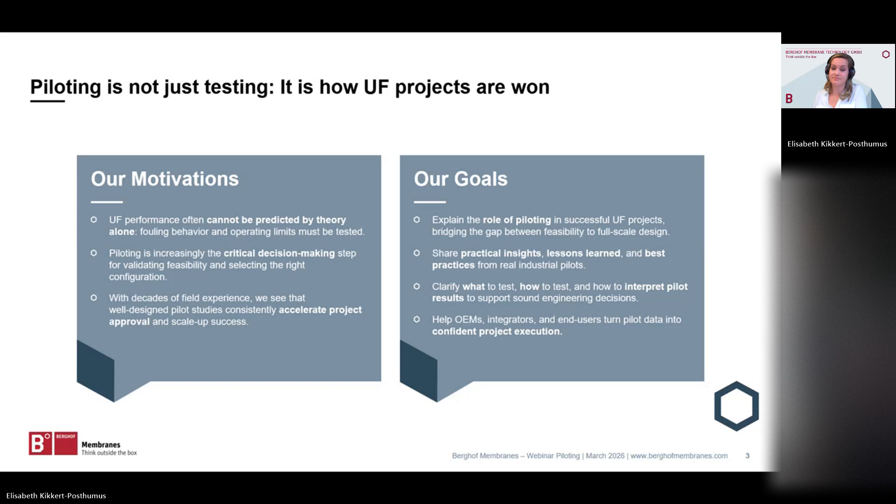We think outside the box. We're the leading manufacturer of tubular UF membranes for the filtration and separation of industrial wastewater and process streams, including industries like dairy, food and beverage, landfills, chemical, pharmaceutical, biogas plants, oil and gas, and many others. With more than 50 years of experience and over 2,500 installed systems across the globe, Berghof Membranes prides itself on the robustness, flexibility, energy efficiency, and superior quality of its external filtration membranes and solutions.

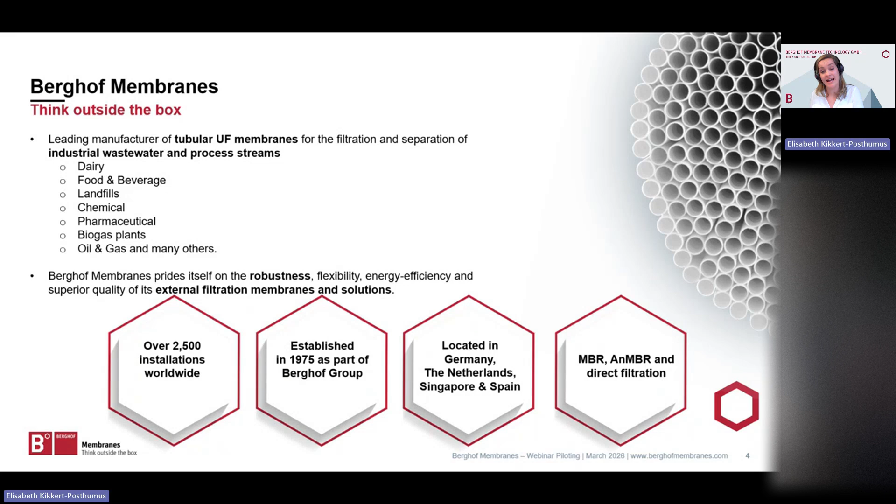We're located in four sites: Germany, where our manufacturing is held, and offices in the Netherlands, Singapore, and Spain. Our core technology is MBR, AnMBR, and direct filtration.

We have proven robustness in over 2,500 installations, as explained. Our membranes are available in different tube diameters, materials, and cutoffs, with multiple features like standard, backwashable, and chemical resistant. We have pilot modules available in different sizes, screening versus scalable. Industrial modules are available in different diameters and lengths, up to 71 square meters, unitary surface.

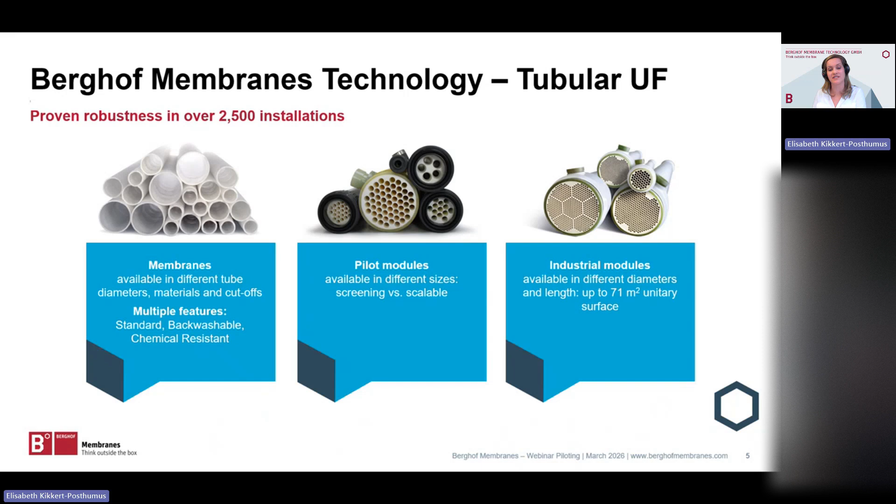We have a BCare service and support program, something Daniel will explain more in his presentation. It involves application analysis, pilot testing, engineering and commissioning, and technical and after-sales support.

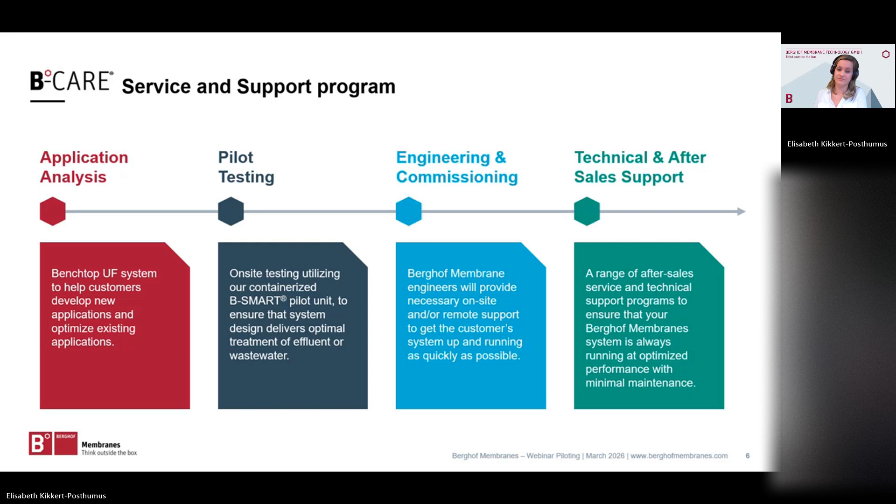Now let's get into detail and discover the best practice approaches for designing and executing tubular UF pilot studies. It's my pleasure to introduce our first speaker, Dr. Elena Meabe. Just a short introduction about her.

Elena is a manager at the Knowledge Center at Berghof Membranes. She's a chemical engineer and holds a master's degree in environmental engineering. She's also a doctor in industrial engineering, with her PhD research work focused on membrane bioreactor technology and the monitoring of membrane performance. To this day, she possesses 18 years of experience in filtration technology, mainly dealing with external tubular membranes. She has deep insight into membrane technology for the industrial wastewater treatment market and will now guide us through key insights on today's topic.

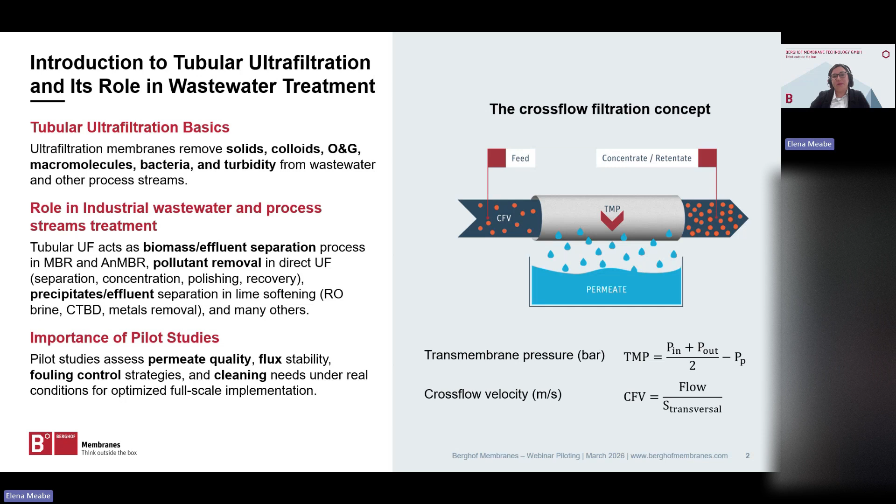On the other hand, it's important to highlight that ultrafiltration performance is often site-specific, and this is the reason why piloting is essential in many cases.

Before starting any pilot study, the most important question is: what do we want to learn from it? Typical objectives include assessing treatment performance, such as permeate quality for target pollutants and the suitability of different membrane cutoffs. Another key objective is defining a sustainable design flux under certain operational conditions.

Pilot studies also allow us to optimize operating conditions, such as cross-flow velocity, fouling control strategies, and CIP protocols, always trying to balance performance with OPEX.

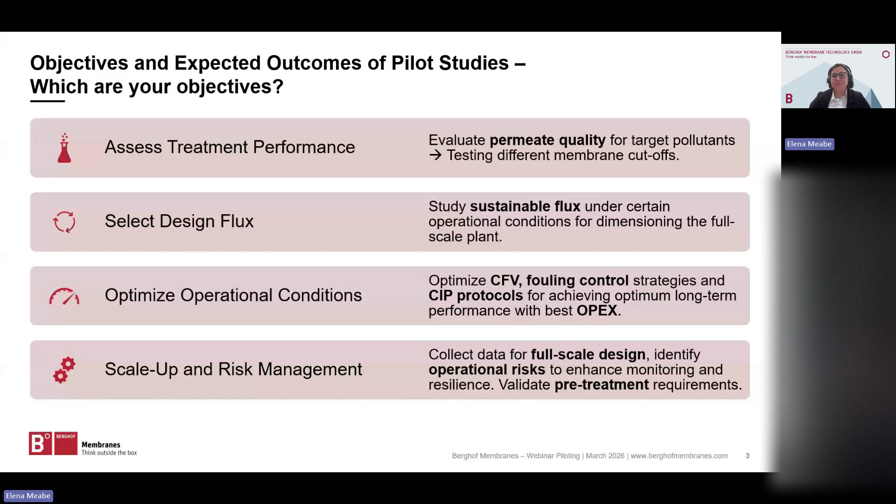Finally, piloting is a powerful risk management tool. It provides real data for scale-up, validates pretreatment requirements, and helps identify operational risks at an early stage.

Once we define the objectives, the pilot must be designed accordingly in terms of scale, pilot assembly, and monitoring strategy. Pilot studies can be performed at different scales, and each scale serves a different purpose.

We have the screening modules, which are typically used to evaluate whether a membrane is suitable for a given wastewater, or for comparing performance with different cutoffs, and also to observe fouling behavior in a first step.

Then we have the scalable pilot modules, which are designed to better reflect real operating conditions. They allow accurate measurement of pressure drops, permeability, and sustainable flux values that can be directly transferred to the full-scale design.

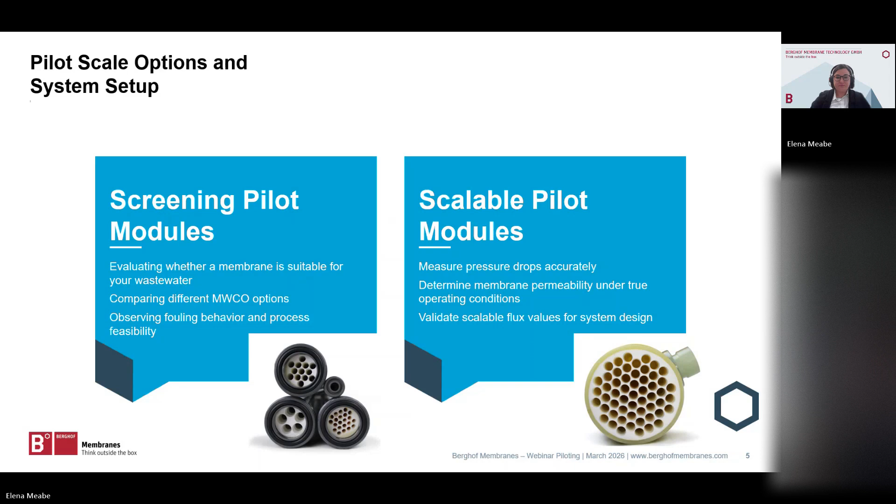When designing a pilot plant, several practical aspects must be considered. First, the operation mode: are we thinking of short-term batch testing, or do we need long-term continuous operation?

Second, the configuration of the UF pilot. It can be based on a feed and bleed configuration, or a simple circuit with just a recirculation pump and some instrumentation. We also need to design for fouling control and evaluate the need for including backwash sequences, for example if we want to approach the project with a B-SMART Eco mode, which relies on backwash sequences for reducing cross-flow velocity and therefore minimizing energy consumption.

Third, we need to decide about monitoring and control. Manual operation can work for short tests, but automated operation with data logging and remote monitoring is strongly recommended for larger-scale demo units.

Finally, we need to define the upstream process. In biological applications like MBR or anaerobic MBR, there are two potential scenarios: the UF pilot can be connected to an existing bioreactor or to a dedicated tank built for the pilot study. Each has different implications that we'll cover later in the webinar.

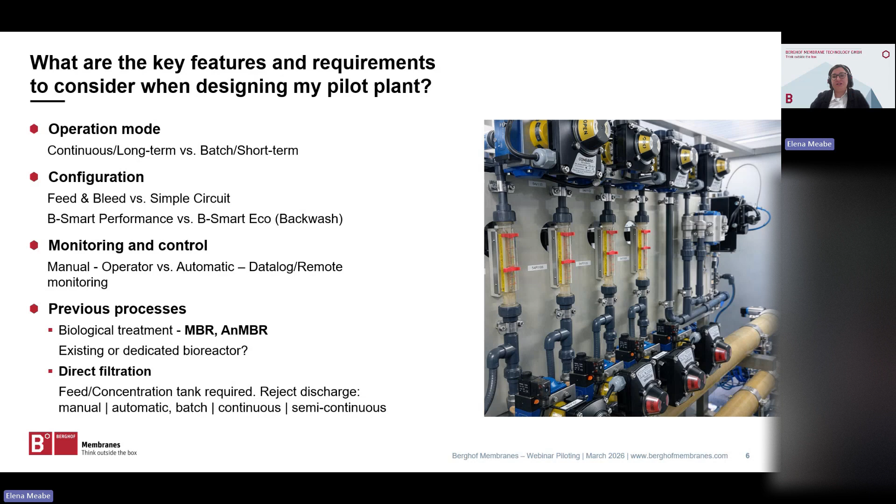In direct filtration applications, we need to install a proper feed and concentration tank, and also decide how to handle the reject and the operation mode, for example batch or continuous reject.

In this slide, you can find a summary of the main parameters typically used to evaluate ultrafiltration performance properly. Pressures, including pressure drop and TMP (transmembrane pressure), tell us how the membrane is being loaded and how fouling develops over time.

Cross-flow velocity is one of the most important parameters in tubular ultrafiltration, as it directly influences shear stress, fouling control, and energy demand.

In feed and bleed systems, the concentration factor inside the filtration loop also needs to be selected and controlled. And in concentration processes, global recovery and its impact on permeate flux must also be evaluated.

Flux and permeability are the core performance indicators, and normalizing them with temperature allows meaningful comparison over time and between different operating conditions.

It's also important to note the relationship between these parameters represented in the figure on the slide. This is the typical performance of cross-flow filtration systems, showing how flux behaves based on transmembrane pressure and how cross-flow velocity impacts the flux.

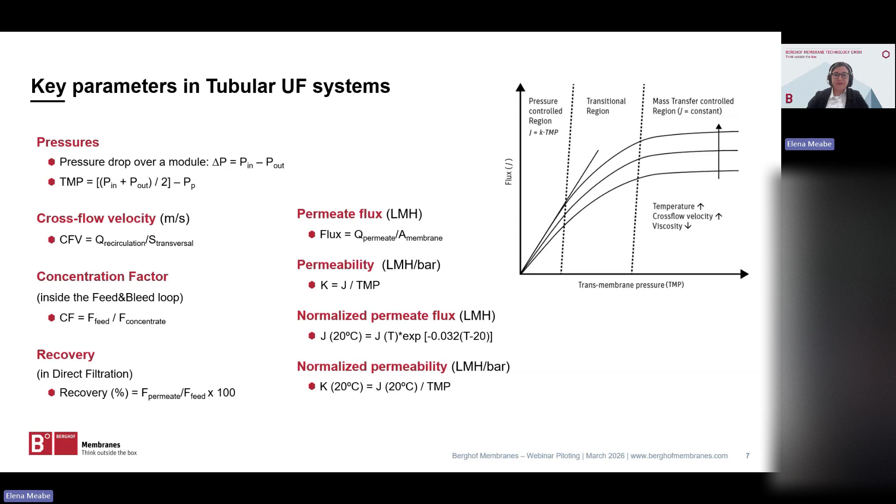A successful pilot follows a stepwise experimental plan. We start by clearly defining the objectives and selecting the membranes and configurations to be tested. Then we establish baseline operating conditions using normally conservative values to ensure stable operation and reproducibility.

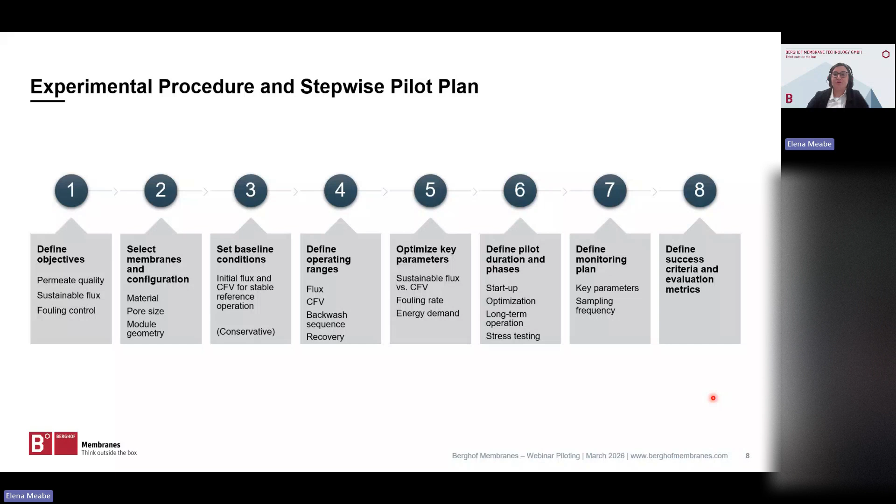Next, we define the operating ranges for key parameters such as flux, cross flow velocity, TMP, and recovery, usually covering both normal and stressed conditions. Then the pilot study itself is divided into phases: startup, optimization, long-term operation, and stress testing if desired. Finally, we need to define a monitoring plan and clear success criteria so that the results can be directly translated into design and decision making.

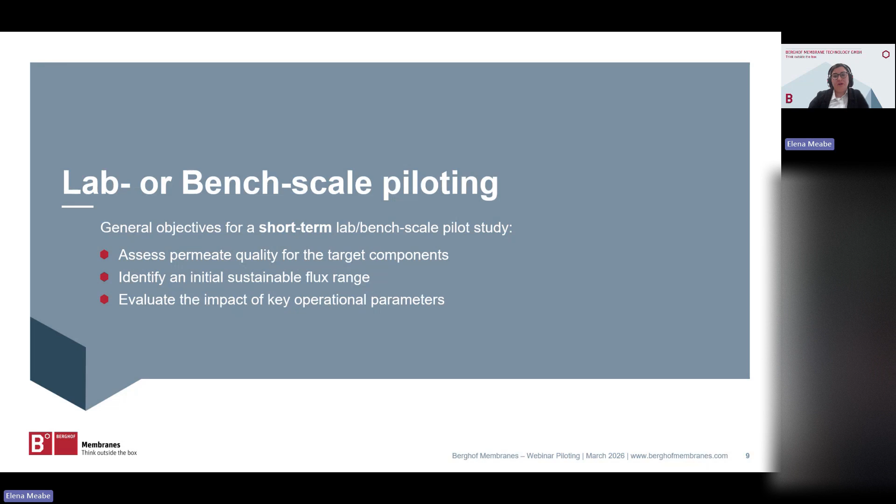Now in my presentation, I will mainly focus on lab and bench scale pilots. These are typically short-term studies, and their main objectives are to assess permeate quality, identify an initial sustainable flux range, and evaluate the influence of key operational parameters. These pilots are particularly useful as a first step to screen membrane options and define a realistic operating window before moving to a larger scale piloting.

Here you can see the basic elements required for the most simple bench scale pilot: a feed tank, a recirculation pump, and the pilot module. Then in the retentate or concentrate stream, we need to install a regulation valve. It can be a manual regulation valve that we use for pressurizing the system and also for controlling the transmembrane pressure.

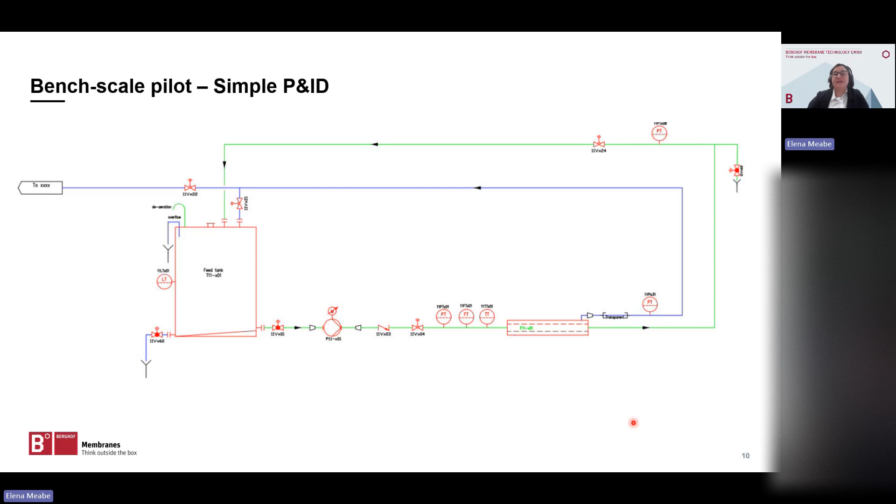In terms of instrumentation, it is quite basic. We need pressure indicators or transmitters at the inlet and outlet of the module, and also something to measure the recirculation flow so that we set the cross flow velocity for the experiment, plus something for measuring the permeate flow. It can even be measured manually with a graduated cylinder and a stopwatch. Usually both permeate and retentate are connected to the feed tank, which enables us to operate in recirculation mode and also to use the feed tank as a CIP cleaning tank.

The procedure for a lab scale pilot usually starts with a clean water flux test to establish the membrane reference condition. Then we evaluate filtration performance under fixed operational conditions, for example cross flow velocity of 4 meters per second and TMP of 1 bar. Usually this first stage is done in recirculation mode.

So we put the permeate stream back into the feed tank to assess a first general value for the flux. Afterwards, the system is operated in concentration mode, discharging the permeate from the system to achieve achievable recovery and system stability. Finally, we investigate the influence of operational conditions, mainly cross flow velocity and transmembrane pressure. After the filtration test, we can perform a CIP cleaning to evaluate the cleaning efficiency and fouling reversibility.

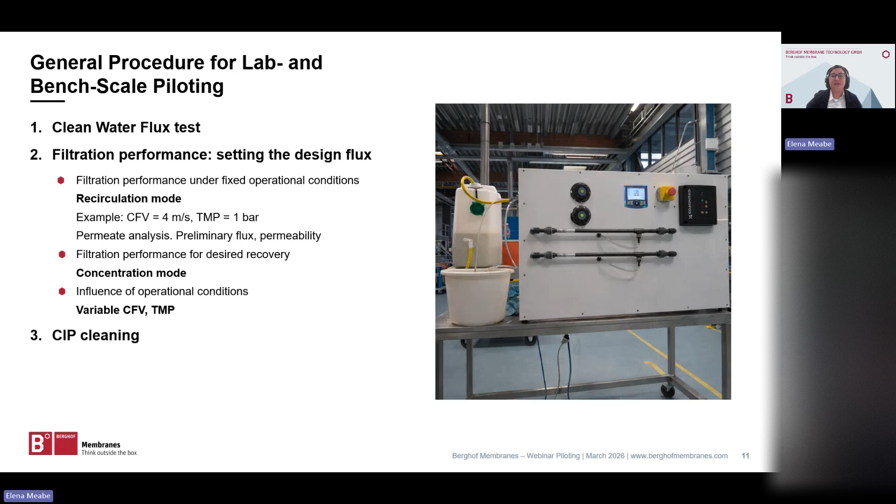This slide shows an example of a bench scale pilot, in this case treating laundry wastewater. On these graphs, the first one shows how permeability and recovery evolve over time. You see a first stage here operating in recirculation mode, at zero recovery. After some time, when the permeate flux becomes more or less stable, we start working in concentration mode, discharging the permeate from the system.

Here you see the evolution of recovery. What we can evaluate is the impact of concentration on the permeate flux. This impact can vary a lot depending on the wastewater sample we are dealing with. Here, for example, we see an initial decrease of permeability, but approximately at 45% recovery, the flux remains constant.

So once the target recovery is reached, 90% in this case, we leave the system operating in recirculation mode again, basically to assess flux stability at the target recovery. Then we evaluate the influence of operational conditions. The result is shown in this second graph.

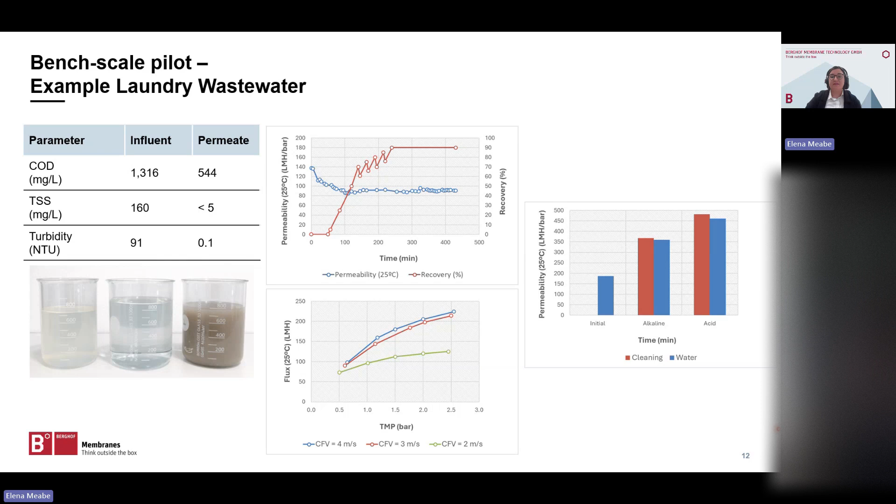Finally, we can apply a chemical cleaning to assess the most efficient protocol.

As I am approaching the end of my presentation, I just want to share some comparisons of pilot results with different wastewaters and a couple of practical tips.

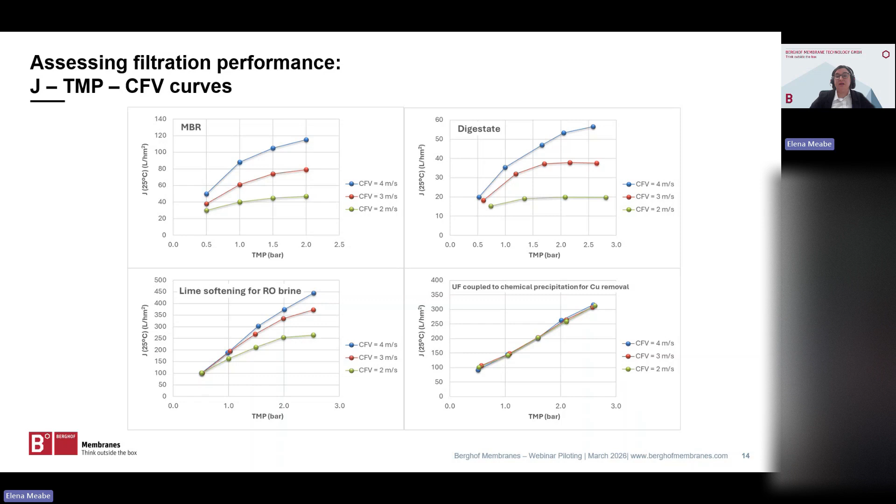We see first a linear relationship between flux and TMP. This is very good, meaning almost negligible fouling together with high permeabilities. But apart from this, there is no impact of cross-flow velocity. These are inorganic particles that are not really getting attached to the membrane surface. So based on this result, we can approach the design with low cross-flow velocity of 2 meters per second and minimized energy consumption.

This is my last slide. I want to share examples of optimization of chemical cleaning protocols, again with quite different outcomes for different wastewaters. First, in this case, it is MBR for digestate treatment.

We see that the initial alkaline cleaning recovers permeability to a great extent, which is logical because in MBRs fouling is mainly organic. But we still see an important improvement with the acid cleaning. In this case, this is due to the high hardness present in the digestate, which produces some kind of inorganic scaling.

We have a second example: oily wastewater, direct filtration for removing emulsified oil from water. Here what we were testing is a standard alkaline cleaning with sodium hydroxide and sodium hypochlorite, but adding a degreasing booster during this alkaline cleaning. You can see the difference is really important.

Here below we have another example. This was cosmetics wastewater, direct filtration. Again, we see that applying an enzymatic cleaning with a commercial enzymatic membrane cleaning product improves the efficiency significantly.

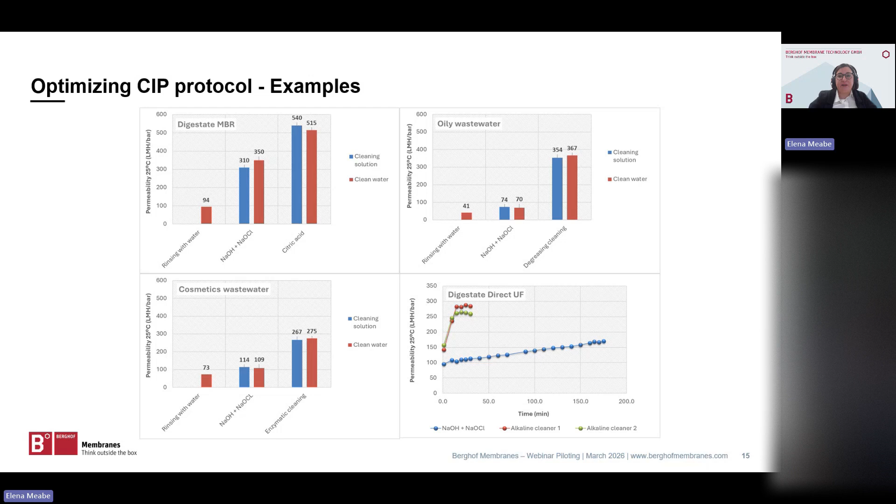This is the last information that I wanted to share today. I hope I have been able to transmit the importance and usefulness of proper piloting. I will be happy to answer your questions at the end of the webinar. With this, I end my presentation. Thank you very much for your attention, and we will cover any questions at the end.

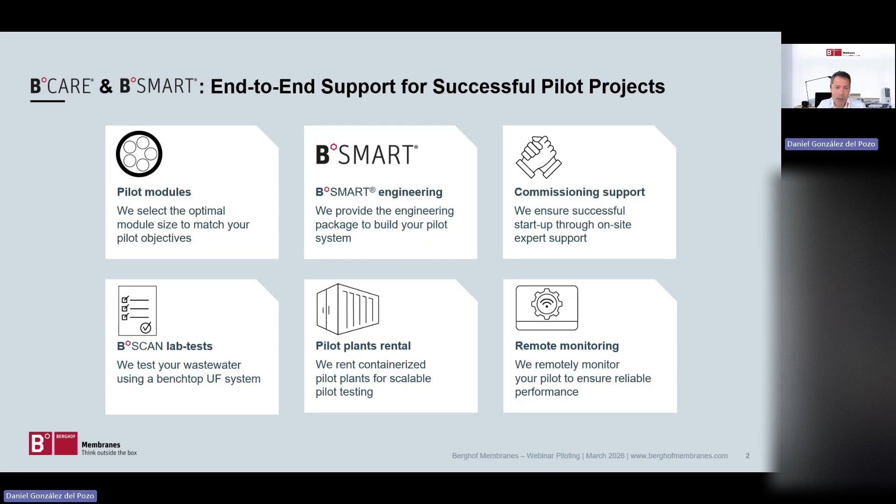Besides all of this, to support our customers during this journey, we also offer commissioning support, providing on-site commissioning support with our service personnel to ensure a successful startup. During the pilot tests, we support our customers by remote monitoring, tracking your pilot and ensuring its performance over the length of the trial.

Let's go deeper on that. Firstly, let's talk about our pilot modules. We offer flexible module options for different ranges. Our P1 module can be supplied in a wide range of options, either in PVDF or PES active layer, different cutoffs, and tube diameters from 5.5 to 12.7 millimeters.

The P1 Flex module gives you exchangeable membranes for testing, so it's a very flexible option. Besides, we have the P5, 13, and 22 modules, which offer increasing capacity. Contrary to the P1 modules, which are fitted with a single membrane tube, these pilot modules have several tubes, so they can produce higher permeate volumes.

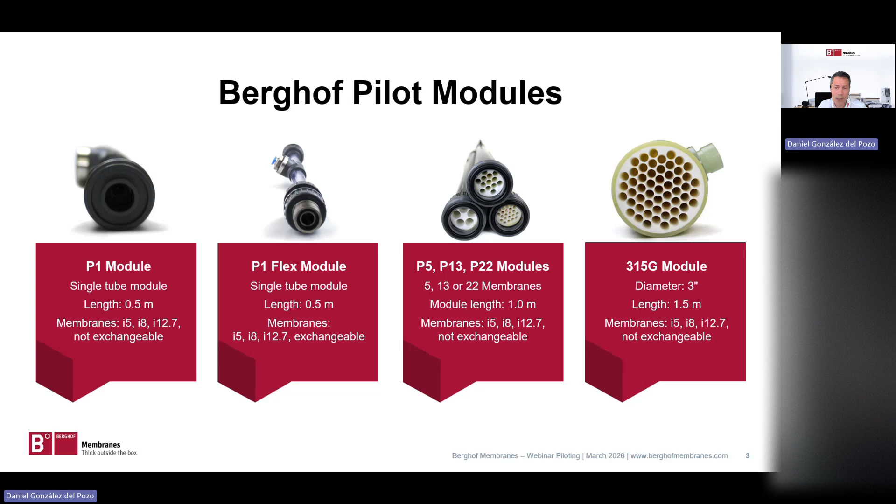Let me remark that generally all of them are intended for lab scale tests. However, we have our 315G module, our largest option for higher throughput applications. This module, which is also provided with a wide range of options, is intended for semi-industrial scale piloting. So the key here is flexibility—you can choose the configuration that fits your specific needs.

Let's focus now on our containerized pilot plants. They are fully operational with everything you really need. They are suitable for different types of applications, such as MBRs, anaerobic MBRs, direct ultrafiltration, ultrafiltration coupled to chemical precipitation, and so on and so forth.

Our pilot units can be operated in what we call eco mode, for reduced energy consumption with automated backwash, or performance standard mode to maximize output or permeate production. The systems can operate at permeate flow rate control, or you can work on the premise of controlling TMP, or transmembrane pressure. You can run up to 4 modules in series, as you can see in the picture, giving you high flexibility.

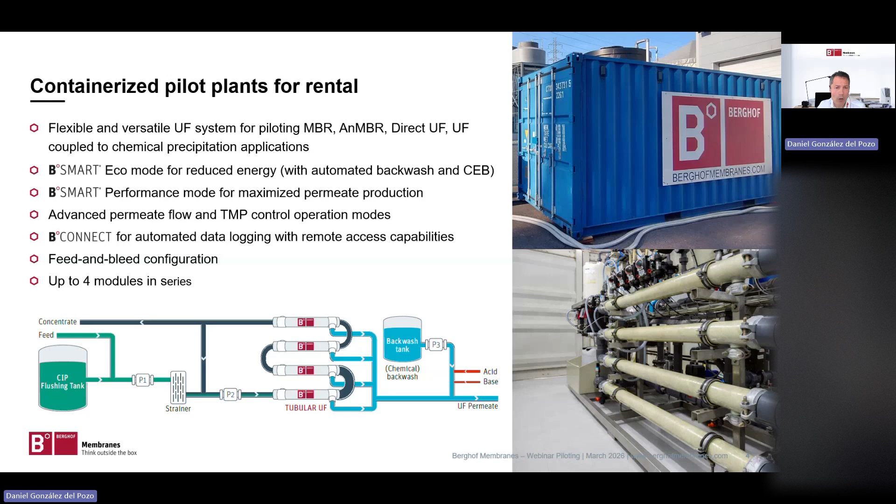Operating data is automatically logged, and the system can be operated and monitored remotely. So in the end, we also see what's happening at your site in real time, and we can take control if it's really needed.

What do you need for a containerized pilot test? You will need basically tap water for flushing and CIPs, compressed air for the pneumatic valves, and a three-phase electrical supply. Internet connection on site, if available, is very useful, although the pilot units are also fitted with a router and SIM card.

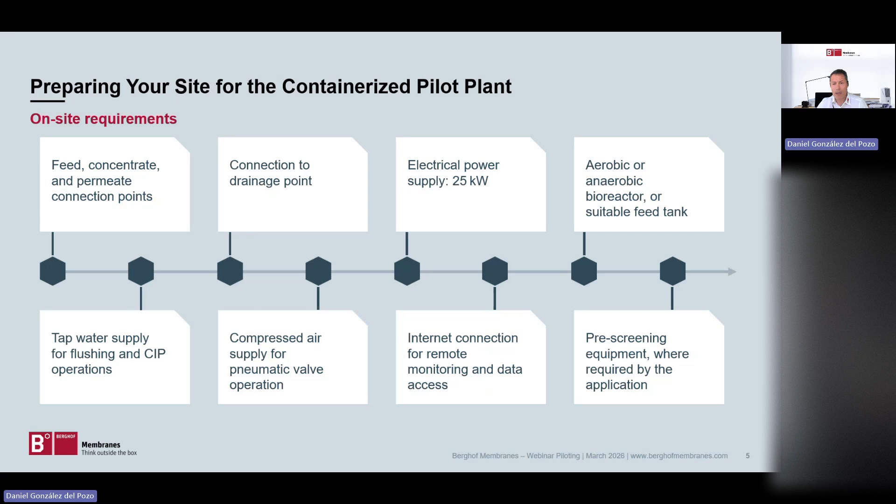Depending on the application and facilities available on site, you might need a feed tank or bioreactor for aerobic and anaerobic treatments. Finally, a very important matter to take into consideration, which I will talk about later as well, is pre-treatment. Proper pre-screening is necessary to avoid any issues during the pilot tests, such as clogging events, for instance.

Okay, so how is all this put into motion? Well, we start with technical proposal and quote - that's quite normal, obviously. And afterwards, we usually hold a preliminary meeting to evaluate your site requirements.

So once we receive the purchase order, we start organizing the shipment of the pilot units to your site. To assess that everything has been arranged properly, we provide what we call a pre-commissioning checklist, which must be signed and sent back to us.

Then, once everything is ready, our team arrives for one week on site for commissioning and training of your staff. Throughout the pilot tests, we provide remote monitoring and technical support as well. And after finishing the trial period, we deliver a final report and eventually a technical proposal for the full-scale project.

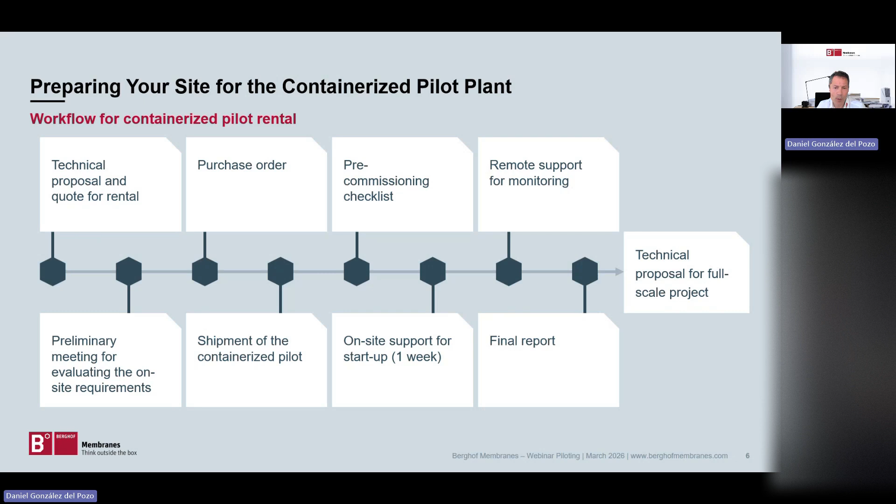What are we actually trying to achieve in these pilot tests? Well, a proper pilot should determine achievable permeate quality. We must evaluate flux stability over time.

We need to optimize operating conditions such as TMPs, flows, backwash frequency and duration, and so on. Different cleaning strategies and the chemical consumption as well. And we must, of course, evaluate energy consumption and operational costs. So in the end, all these matters are essential for a full-scale design.

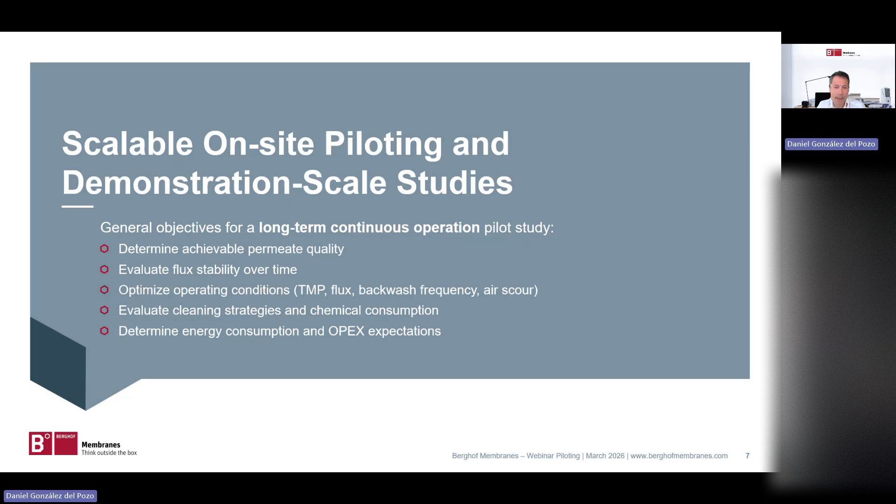Now let's have a look at our experimental approach. We follow more or less a structured plan here. Firstly, we define a baseline of operating conditions conservatively. Secondly, we stabilize the system and verify a steady operation.

Once this is achieved, we start increasing flux stepwise to find the maximum stable flux. We also evaluate the impact of cross-flow velocity on performance and energy use. Additionally, we assess backwash frequency and duration, if any, because not in all applications is backwash applicable, and as well chemical options, like chemically enhanced backwash, for instance.

Another important matter is to optimize the cleaning in place approaches. And finally, we define sustainable operating conditions that are suitable for scale up. So in summary, this is a systematic approach that gives you reliable data, and it's not based on either assumptions or preconceptions.

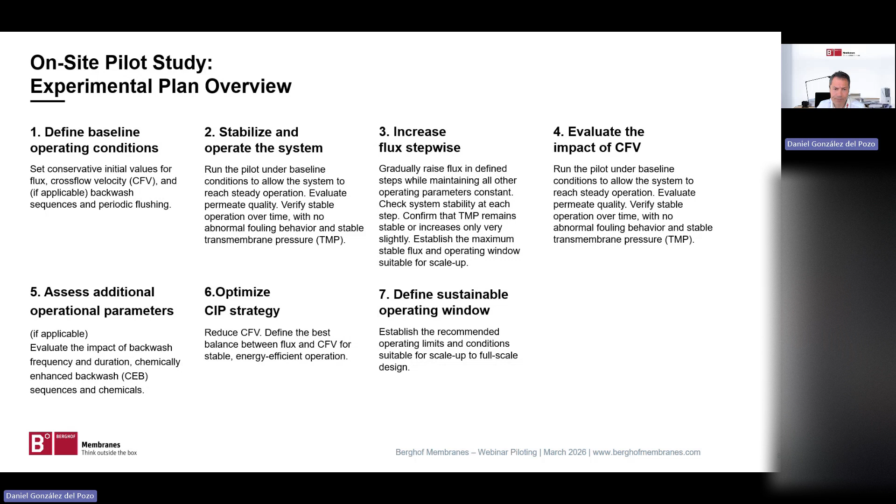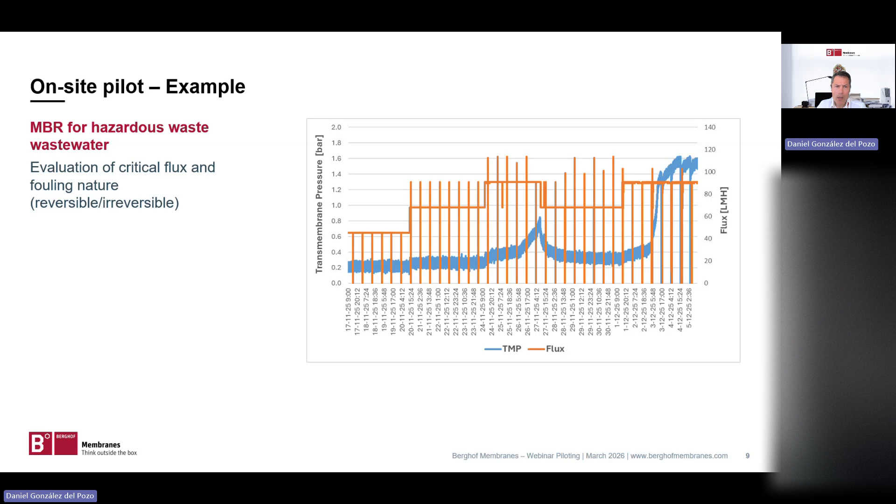Well, I'd like to finish this presentation with some practical tips. So let's talk about some practical insights here. For example, the integration of pilot units to existing bioreactors.

So for biological treatment, connecting to an existing full-scale bioreactor can be somehow problematic because you inherit its conditions. Consequently, we often recommend a dedicated pilot scale bioreactor for true optimization.

So, well, among other reasons, there are a couple I would like to point out here. The first one is pre-screening. The presence of coarse solids or fibers, hairs, that don't have a significant impact in conventional systems can cause serious issues in MBRs and anaerobic MBRs. So a proper pre-screening upstream of the pilot scale bioreactor will minimize these potential risks.

And on the other hand, one of the main advantages, as you may know, of both MBRs and anaerobic MBRs is the possibility of running the system at much higher MLSS concentrations. So to simulate this in a pilot test, a pilot scale bioreactor is needed, obviously, in order to get those working conditions.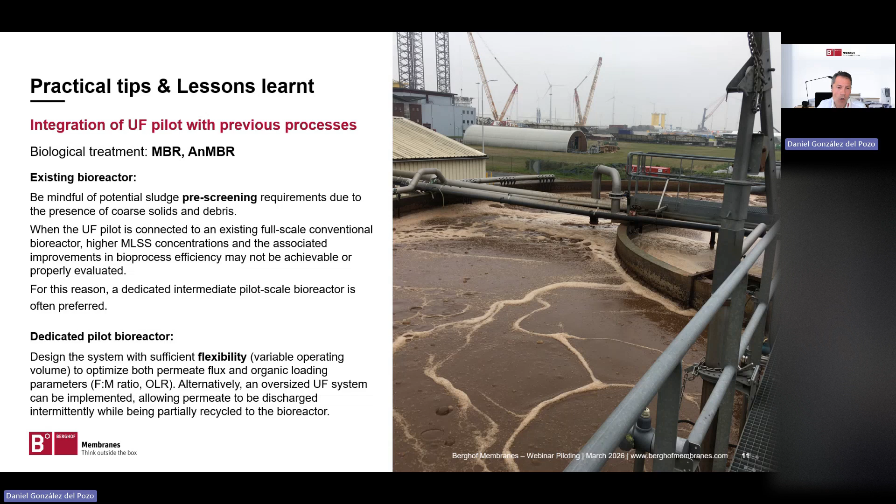We also can operate in semi-continuous mode, and of course as well in batches and semi-batches. These last two are quite typical for direct filtration applications where you are looking for the highest level of concentration of the fluid to be treated.

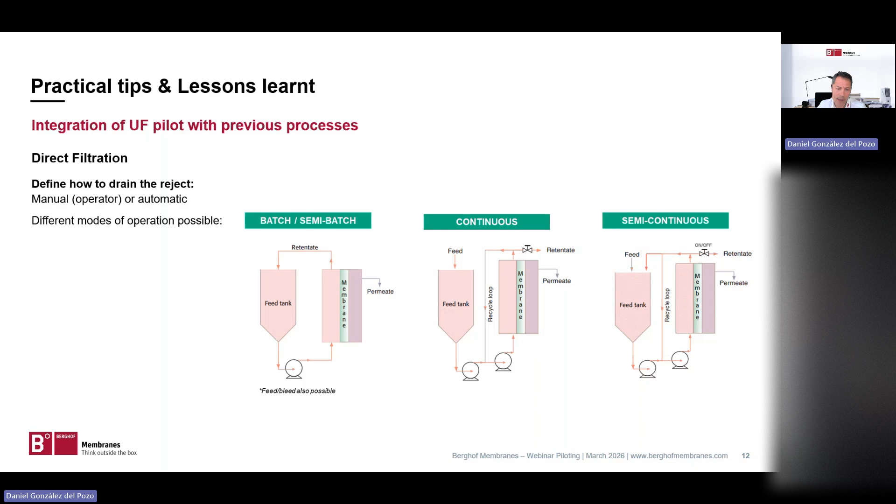Going back to pre-treatment and pre-screening of the wastewater, actually it is quite critical. The standard practice is 0.75, 0.8 millimeter mesh, or in the range of 250 to 350 microns, if you foresee the presence of fibers and hairs in the wastewater. A simple sieve test will tell you exactly what pretreatment you really need.

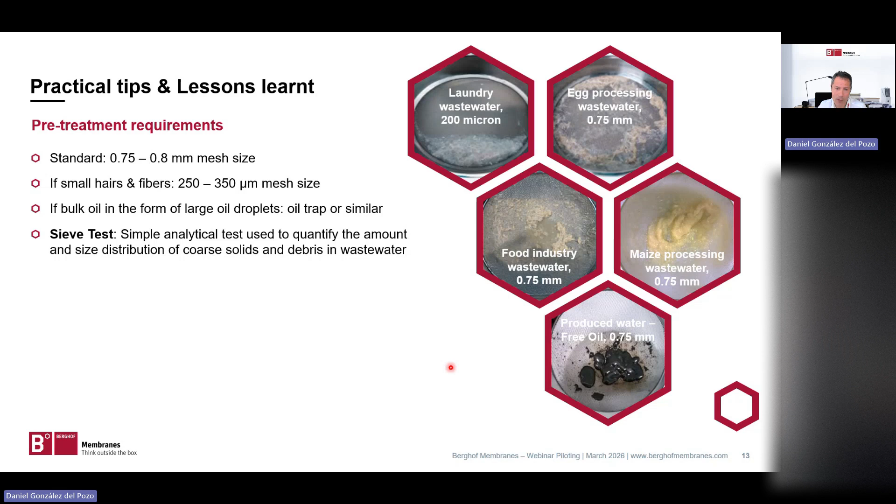Let's talk about something different. Another usual topic of discussion is biomass control in MBRs. Please forget about V30 and SVI, which are common follow-up parameters for conventional activated sludge, because in reality these settling measurements don't matter in MBRs - the membrane is a physical barrier and they don't have a significant effect on membrane performance.

Instead, we should focus on permeate quality, flux stability, and TMP trends. This is basically exactly what really matters in MBRs.

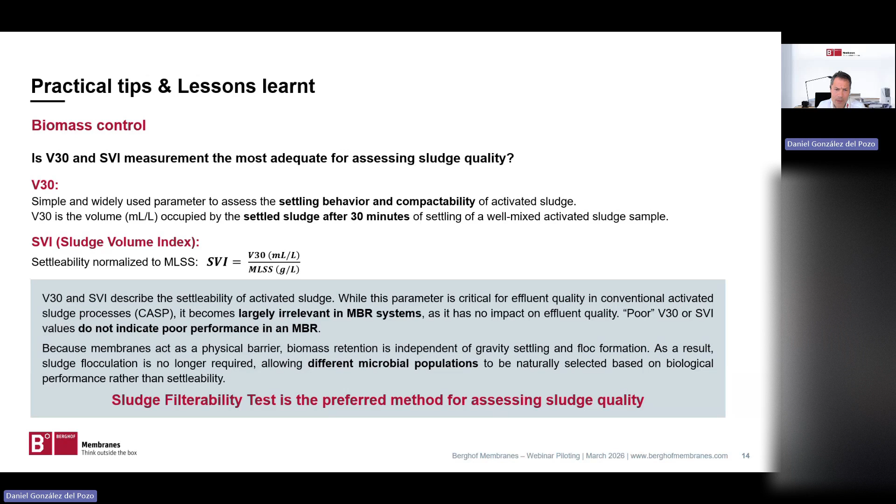On the other hand, be careful with lab analysis on high salt wastewater. Dissolved salts can create false suspended solids readings or data. For these particular cases, as stated in the general protocol, the filters must be washed several times before drying them out, to obtain a real value.

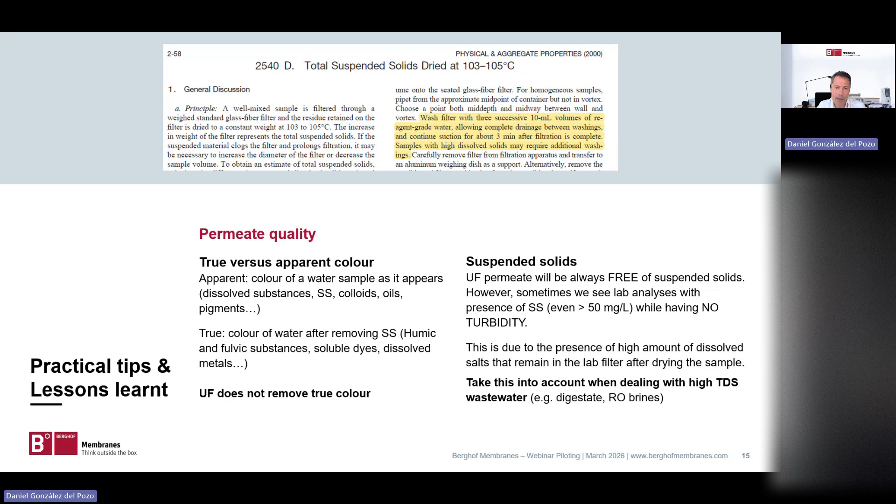To wrap up, the main takeaway of all of this is that piloting plays an important role in the design of a full-scale system, especially when there are a high level of uncertainties in the correct approach for a new project. This will help you de-risk your full-scale investment and optimize operating conditions from the very beginning.